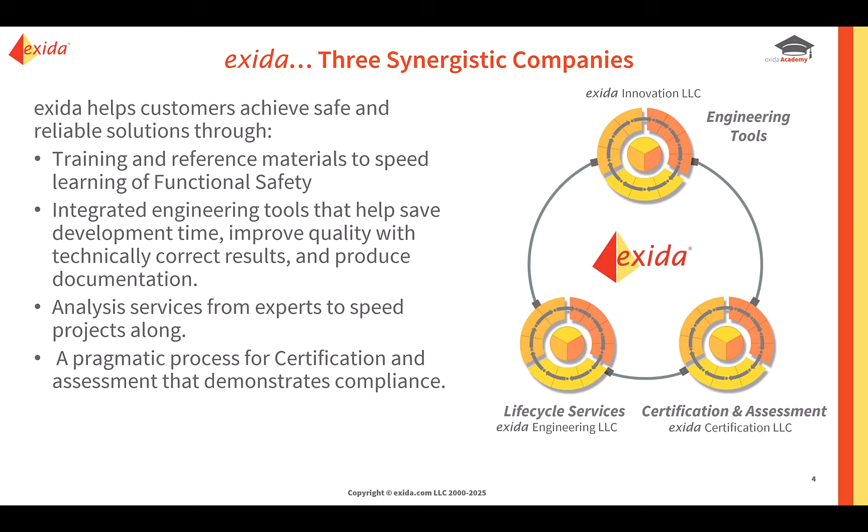exida has a suite of products and services to help all those who are new to functional safety, from training through functional safety certification. For some, the discipline of functional safety seems overwhelming.

I once asked a senior engineer, George, for an estimate of the effort it would take to meet this new functional safety standard. He said, "Give me a week." I said, "Okay." I went back a week later and asked, "Well, what's the effort?" He looked me straight in the eye and said, "If we take all the engineers in this building and work the rest of our lives, we will not meet this standard." Oh boy, George, bit of an overreaction?

Well, for those who have only a little bit of that panic about functional safety, we can explain a bit today. We can talk about what is functional safety. We can categorize many pages of requirements into two fundamental concepts of functional safety. We can present an example new product development which meets the requirements, and we can discuss functional safety certification, what it is, and how to prepare.

Functional safety is an engineering discipline defined by international standards for the design and operation of automatic protection systems. You're probably thinking, what's an automatic protection system? Well, it's a system that detects hazardous, dangerous conditions and automatically takes action to reduce or hopefully eliminate the harm.

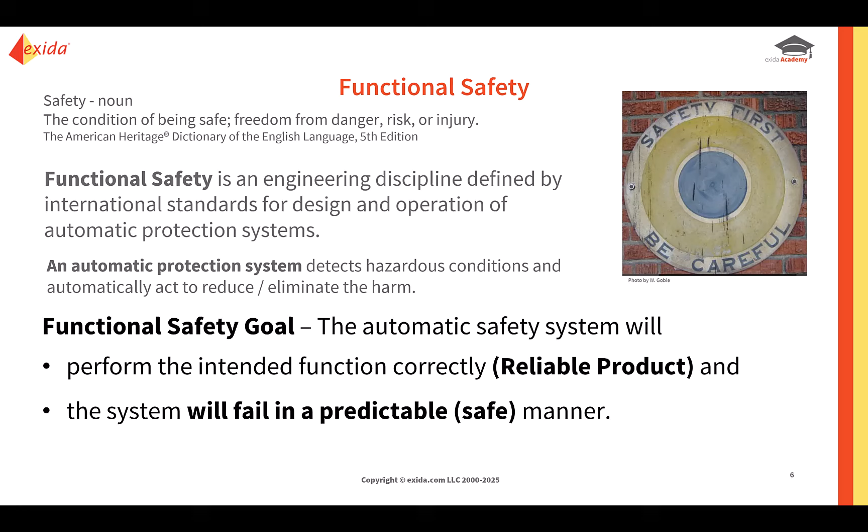But for functional safety, we must go further. We must deal with product failure modes and design so that if the product does fail, it will fail to a safe state. Functional safety is spreading to many different industries.

You can look at the various potential applications from different industries. Let's take a look at the autonomous lawnmower, for example. One of the most important safety functions is detect an obstacle: a person, maybe an animal like my pet, maybe a rock, which could damage equipment. When we detect this hazardous condition, we will de-energize the wheel motor, de-energize the brake withhold, which will apply the brake, and notify the operator via a wireless, probably cell phone connection.

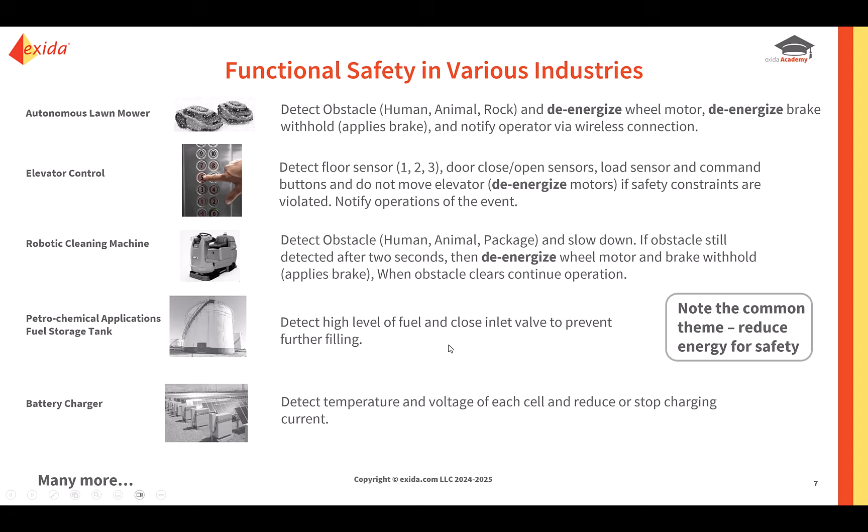If we look at all the other applications, we are seeing common requirements for detecting dangerous, hazardous conditions and taking actions. Let me drop down to petrochemical. Petrochemical applications are where functional safety started. For example, detect high level of fuel and close an inlet valve to prevent further filling, actually to prevent tank overflow. Note the common theme: reduce energy to achieve safety.

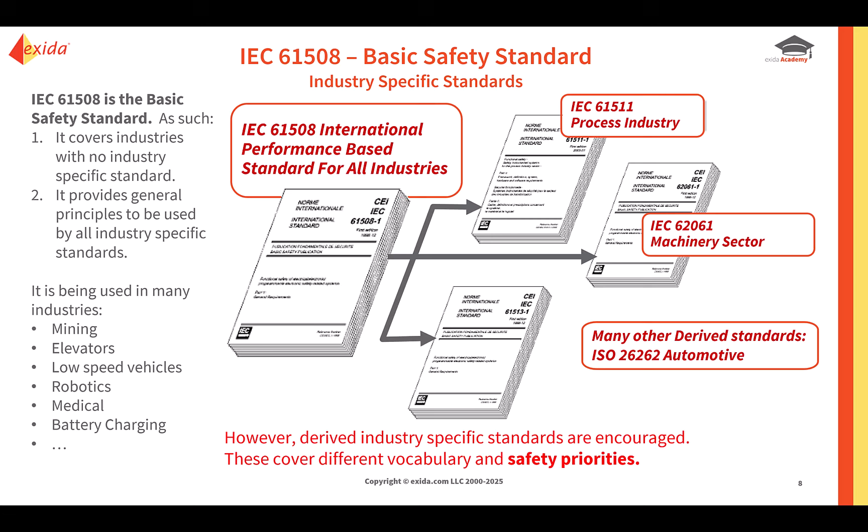IEC 61508 is the basic safety standard from IEC. There are industry-specific standards derived from 61508, and these standards provide different industry vocabulary and deal with different safety priorities of different industries. 61508 is used, however, in many industries where there is no industry-specific standard.

You can read the definition from IEC 61508. I remember reading it early on and thinking, I'm not sure I understand this. First thing I did is look up the acronym EUC, Equipment Under Control. And I was thinking, now what does that mean? It's the process we are trying to protect.

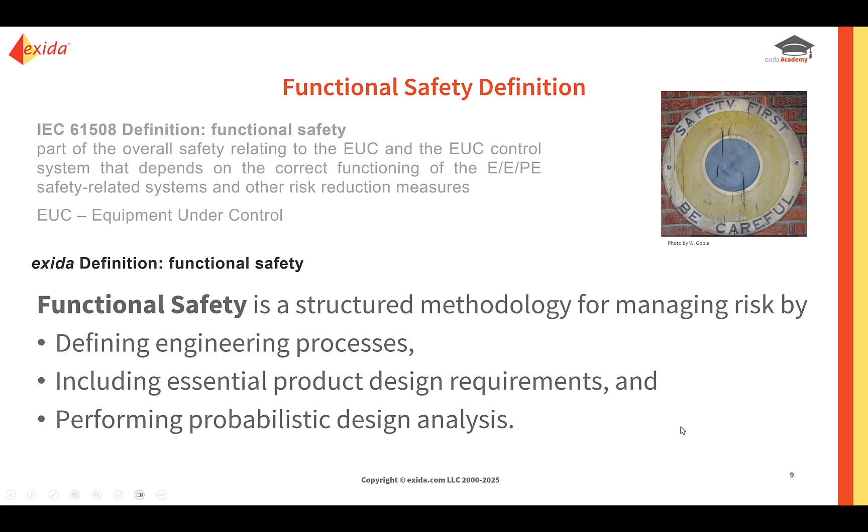That is very formal, so exida prefers a definition: functional safety is a structured methodology for managing risk by defining engineering processes, including essential product design requirements, and performing probabilistic design analysis. We can take all of the pages of requirements and sum them up into two fundamental concepts.

Number one, on the left, is the safety life cycle. That's the term they use for a detailed engineering process created to achieve high levels of design quality. The other concept, probabilistic performance-based system design, deals with random failures. That helps us achieve higher levels of hardware reliability.

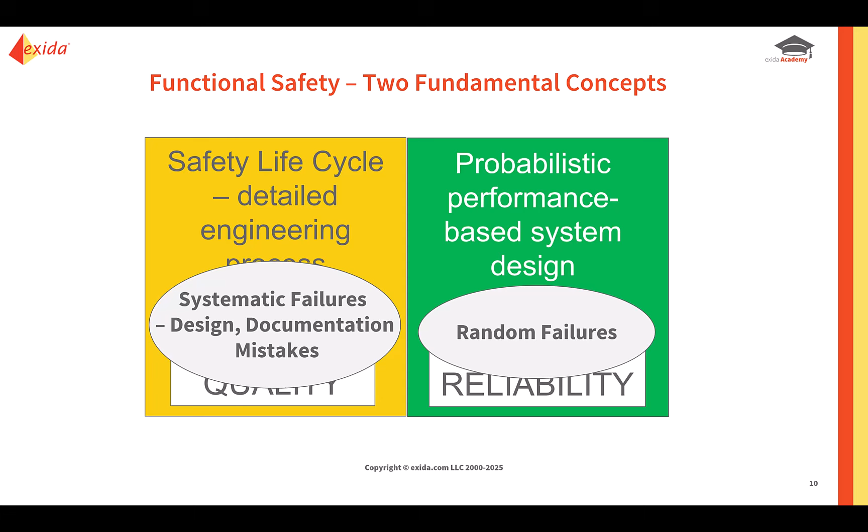These categories of failures are called systematic failures, design documentation mistakes, random failures like hardware component failures, or maintenance failures that cause hardware failures. An engineering process for new product development must be documented. Now, you probably recognize the V model on the right-hand side. It's very commonly known. The safety life cycle applies from initial requirements to the release to production.

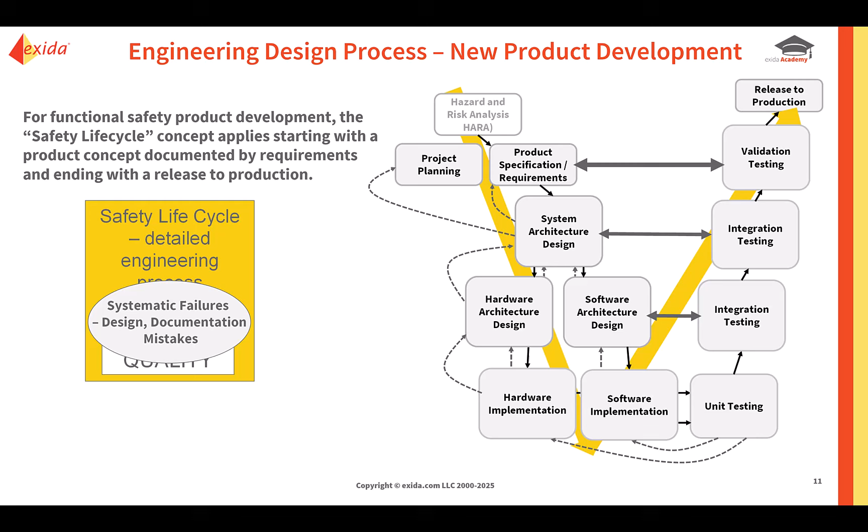There is a metric called systematic capability. The development process is rated per process rigor and design features. A defined development process is assessed and given a rating according to one of the 4 levels in the standard called Safety Integrity Levels, or SIL.

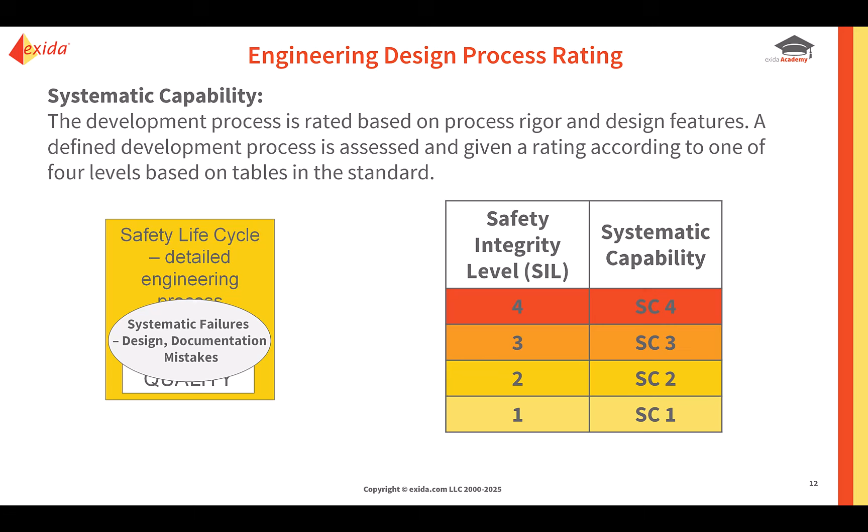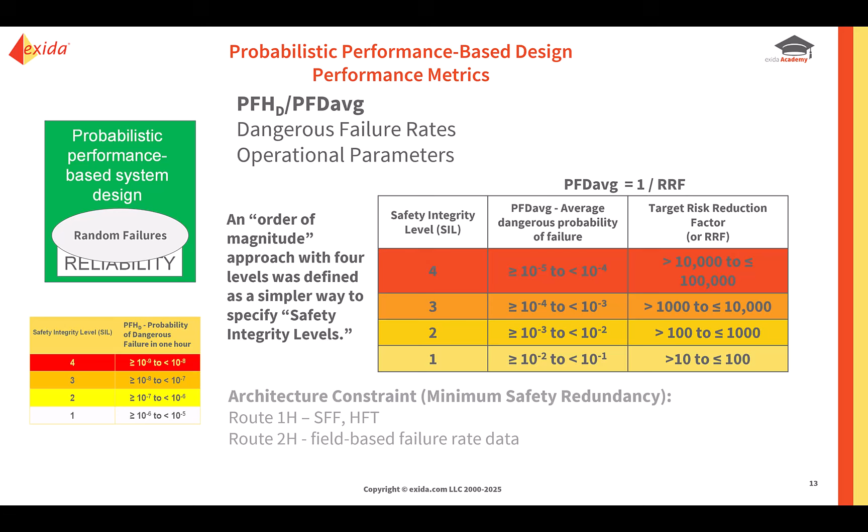Systematic capability rating just matches the safety integrity level. As the level number goes up from 1 to 4, the level of process rigor and design features increases. The probabilistic concept depends on detailed hardware analysis. There are 4 safety integrity levels, and each level has a maximum probability of average dangerous failure.

The development process for systems versus product is quite different. Looking at a system for a minute, consider the example of a low-speed vehicle such as an autonomous tractor.

Sensors are selected to recognize and sense the dangerous conditions. For example, a LiDAR might be used for obstacle detection. A controller, typically an embedded controller, is part of the system because it's programmed to detect signals from these various sensors and convert them to potentially dangerous, recognizable conditions. Finally, there are products on the output of the safety controller, which are used to actually implement the safety function, and in most cases that means removing energy from the process.

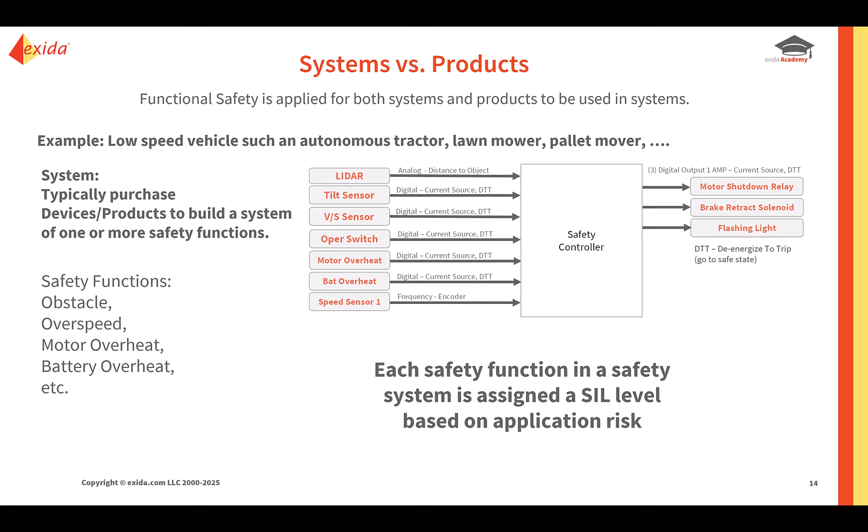Each safety function is assigned a SIL level based on application risk. As we look at different applications in different industries, we see that most risk analysis shows a SIL 2 or a SIL 3 requirement.

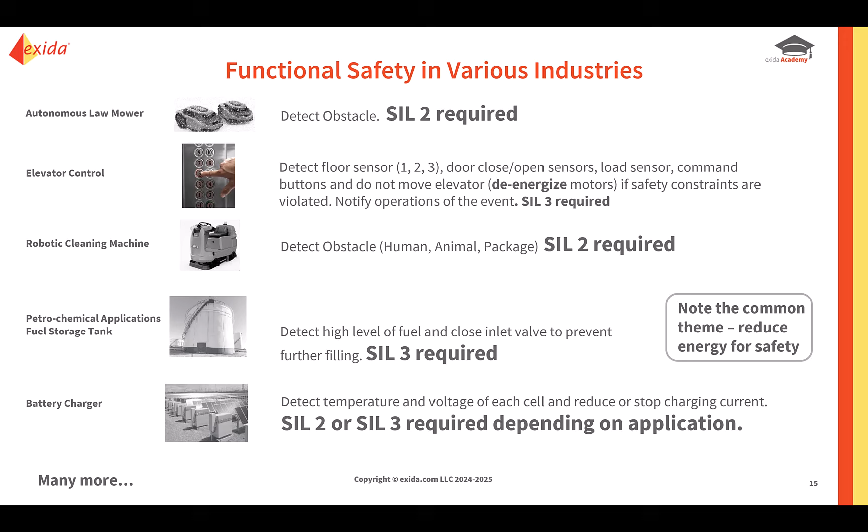Product development is quite different. If you look at the bottom part of the screen, what we're talking about here are devices, products like the sensors, like the safety controller, and like a flashing light or a motor shutdown relay.

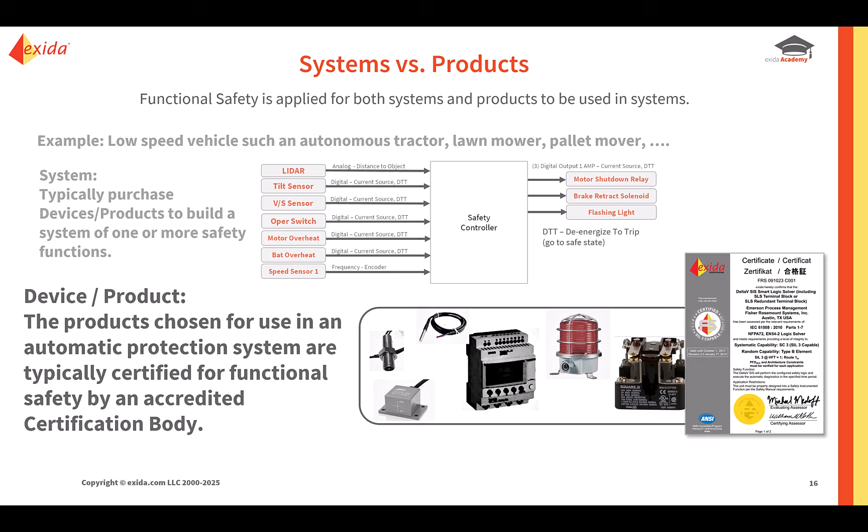Devices are products chosen for use in an automatic protection system, and they are typically certified for functional safety by an accredited certification body. Now, we talked about the need for a development process at the product level, and we showed you this V model, but that is not nearly enough detail.

A documented development process for functional safety must show the engineering tasks, input documents for each task, output documents produced by each task, and the design verification tools. Let's call them quality verification tasks that check to make sure each step was done properly with sufficient quality.

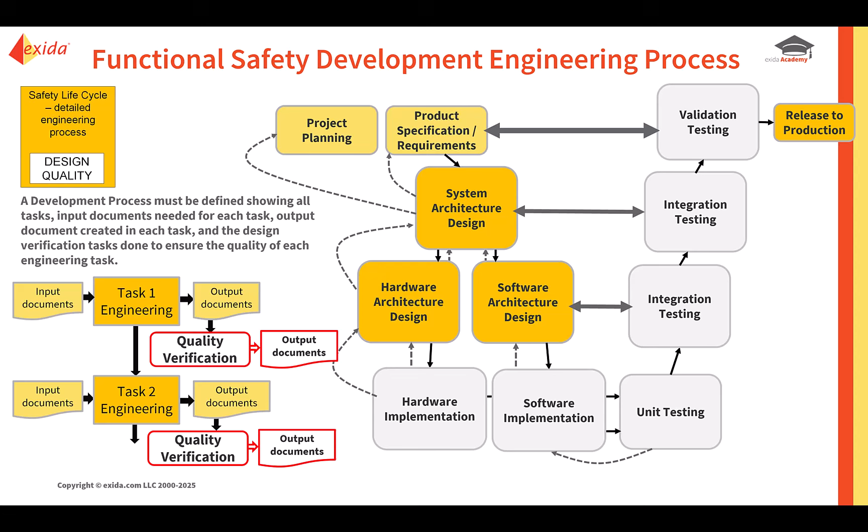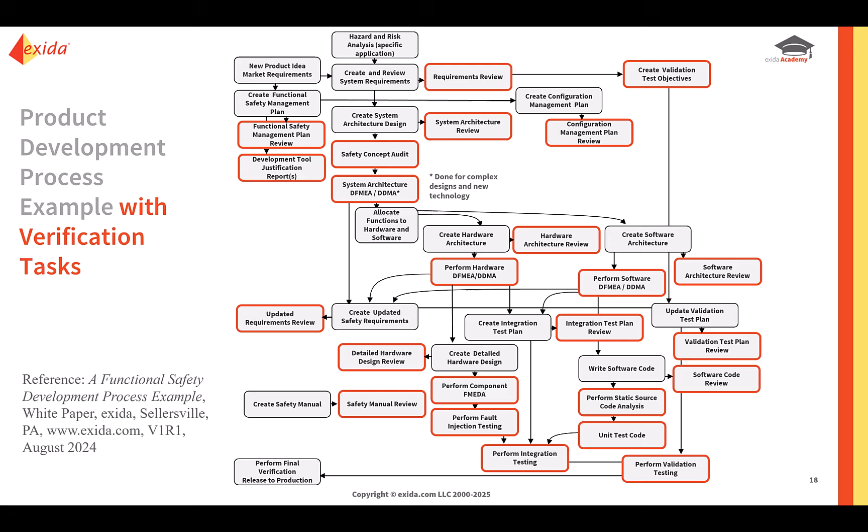A documented, audited process is required with sufficient detail for a new engineer to understand. The concept of corporate tribal knowledge is not sufficient. Now, here's a drawing that shows a development process with more detail, including the design verification tasks. We're going to talk about each phase of development from this picture in the next few slides.

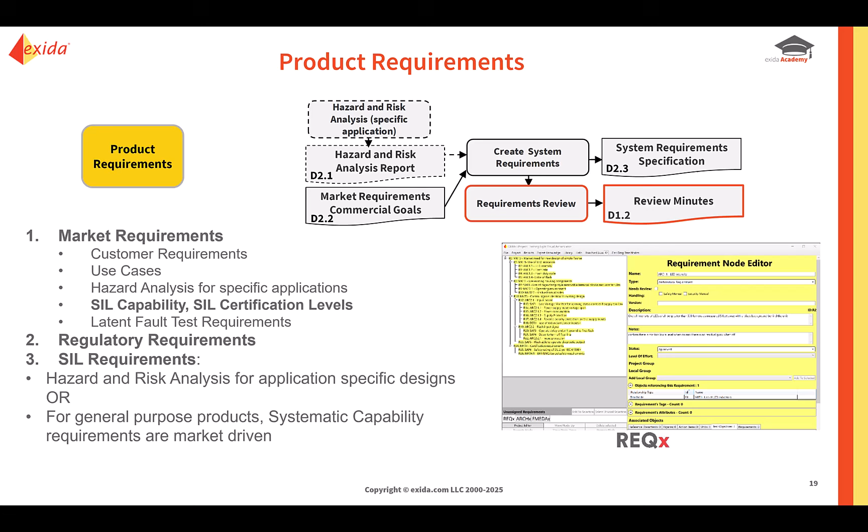Product requirements include market requirements, regulatory requirements, and functional safety requirements from a hazard and risk analysis if the product is being designed for a specific application. However, that's not typically the case, and for general purpose products created to be sold into many different applications, systematic capability requirements are market-driven. Generally, requirements are categorized.

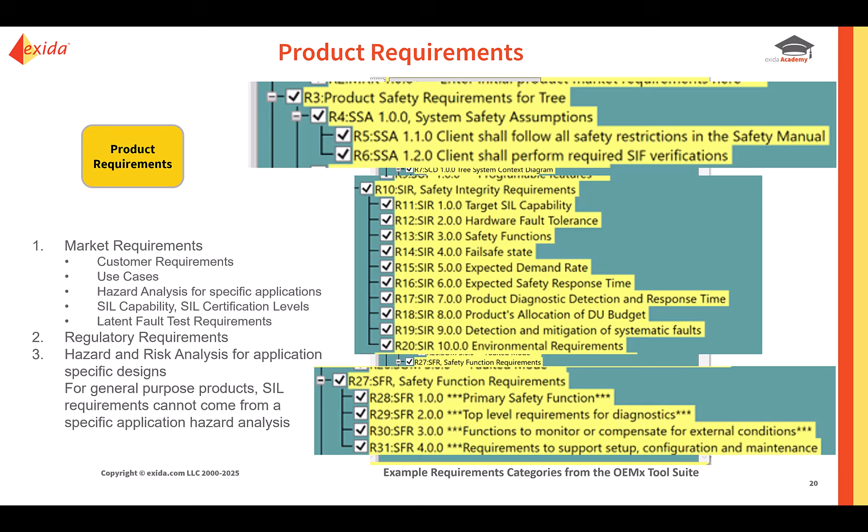They might include, for example, system safety assumptions. They might include safety integrity requirements, safety function requirements, to as much detail as necessary for proper implementation.

As soon as draft requirements are available, we must start the validation test plan. At this point, it's perfectly acceptable to simply write down high-level test objectives. And what we mean by the word test is any actual test, an analysis, or an inspection.

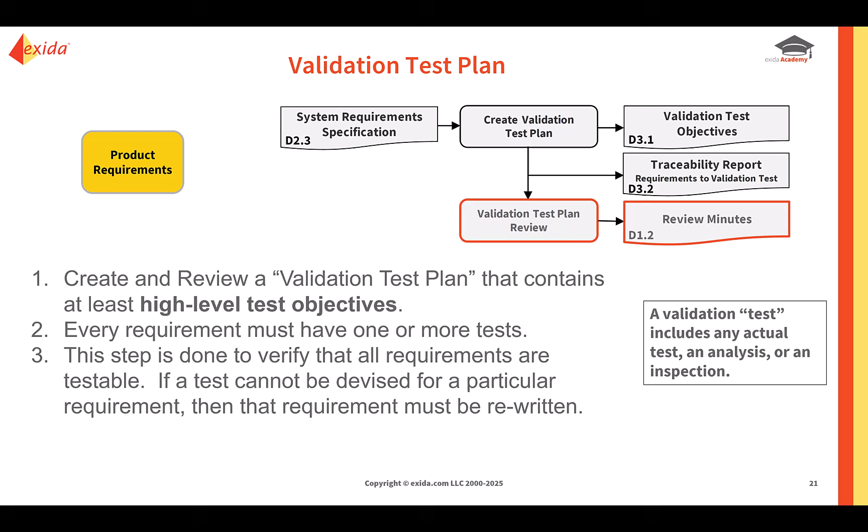Every requirement must have one or more tests. Each test could satisfy one or more requirements. We start the validation test plan because we need to make sure that all requirements are testable. If we can't think of at least one validation test plan objective, then that requirement is probably quite unclear and must be rewritten.

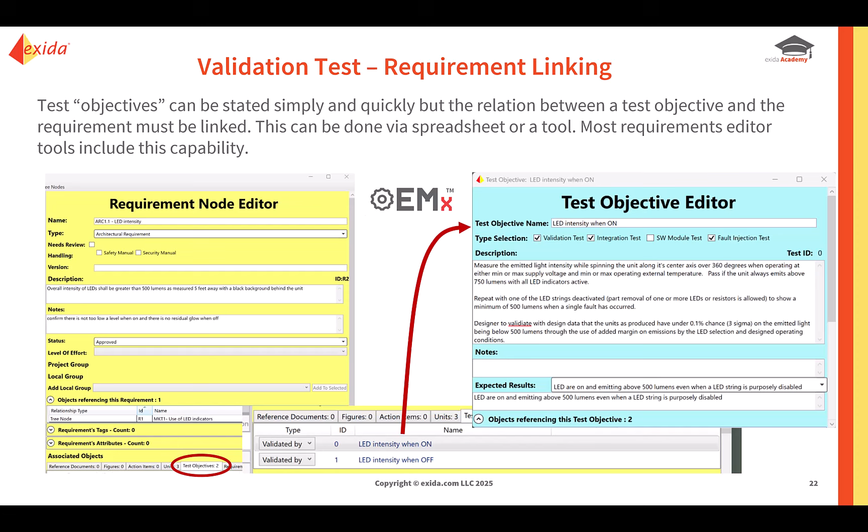One thing that is required by functional safety, and although it seems bureaucratic at times, it's really valuable: there must be links between requirements and test objectives. What we do with this is verify that there are at least one or more tests for each requirement. Now, fortunately, most requirements editor tools include this capability.

Once we have requirements, we can start architecture design. We create and review an overall design by hierarchically partitioning large functions into subfunctions, and that's a classical structured engineering process. We go down to the level where each functional unit has one function or a related set of functions. When that is done, functions are allocated to hardware and to software.

When we have a good hardware and a good software architecture, we perform design verification with design deviation and mitigation analysis to verify design integrity. We update the requirements, perhaps if we find things we have missed, and then we must update the validation test plan.

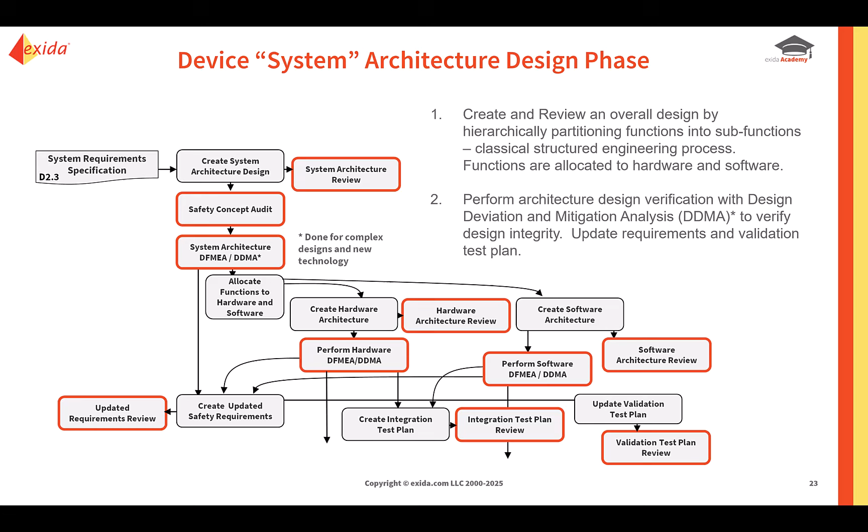What is this thing called design deviation and mitigation analysis? Well, it is an enhanced DFMEA technique, design failure modes and effect analysis. DDMA accomplishes the essential purposes of DFMEA, but it also gathers the important information needed to document functional safety and to provide input to later analysis tasks. The primary value in a DFMEA is to find problems early in a design, and if needed, recommend mitigations.

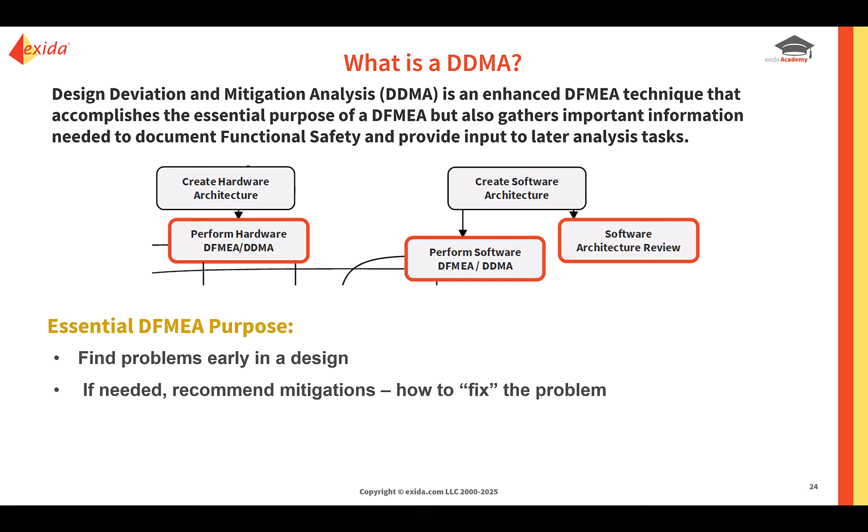In other words, this is not good. How do we fix this problem? Don't we do this in a DFMEA? Yes, the essential purpose is accomplished.

But what's missing is the need to gather important information needed for functional safety and provide input to later analysis, because that's not normally part of a DFMEA.

The information we need includes a description of all automatic diagnostic mitigations intended for the design. We need to know the action taken when a diagnostic detects a failure mode. Yes, you have to address that in the architecture design. We need to estimate the expected effectiveness of any diagnostic for a particular deviation, a particular unit failure mode.

We also should, at this point, define any latent fault tests, or what's known as a proof test. A proof test is a valuable concept that can drastically improve safety. It needs to be planned as part of the architecture design.

And lastly, during the architecture design, we understand how units are connected. This is the perfect time to define any needed integration tests. Now, it's not commonly done in DFMEA at all, and a lot of people say, why do you do that for? I'm not going to run my integration tests until later in the process.

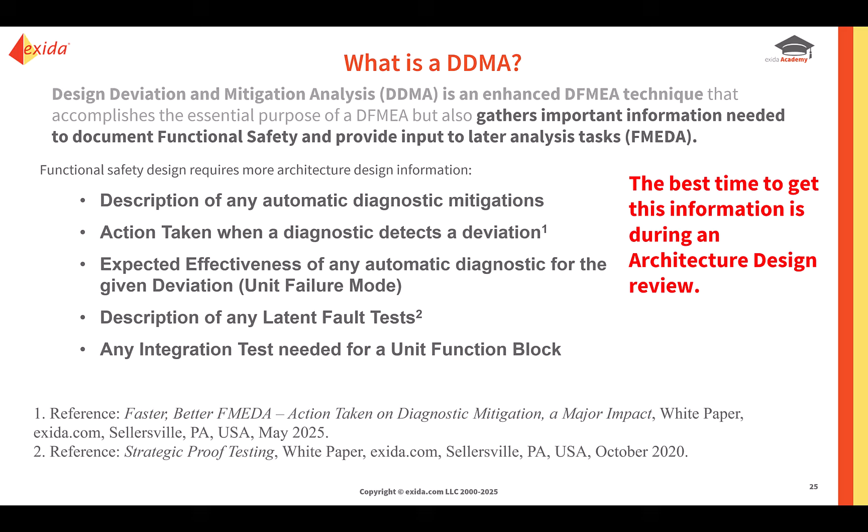There are DDMA tools available. Some of them have suggested deviations and mitigations. Some of them provide a common resulting impact, an end-level failure mode. Some of them have suggested integration test objectives and latent fault test objectives. Some of them have estimates of the diagnostic coverage for designated automatic diagnostics.

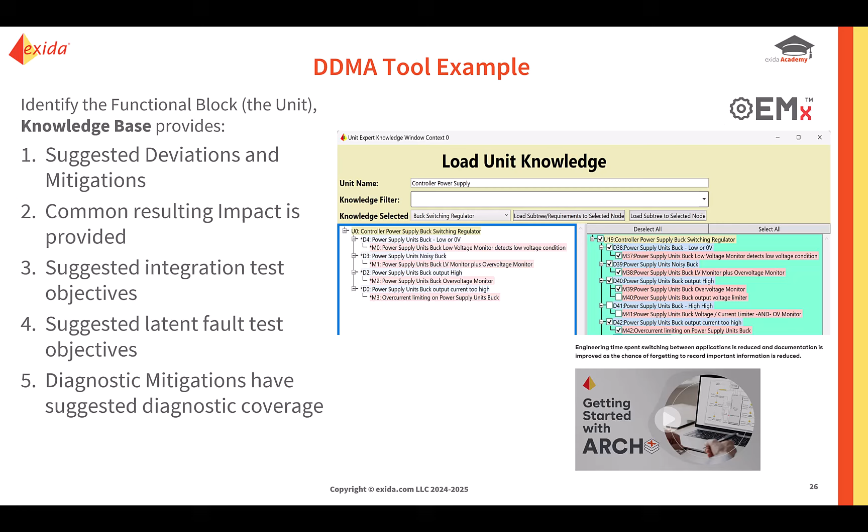Let's take an example of this simple visual flasher. Whenever a dangerous condition occurs, an input signal tells it to start flashing a bright red signal. Normally that means, if you're near me, leave now. The power supply block is of interest.

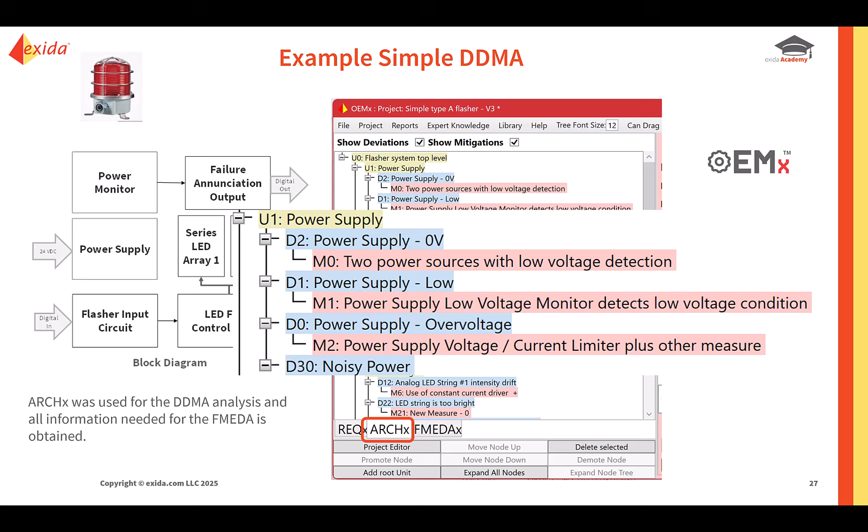Let's go to that first because it's something most people understand. If I hit a DDMA tool and select a unit power supply, the tool will provide failure modes, or what we call deviations, and they are given in this light blue background color. I can see that the designers have chosen 3 mitigations for these particular failure modes, and they are all displayed from a suggested list.

When the architecture is complete, and we have a list of all the blocks, and we have a description of the function of each block, we can proceed with hardware design. And that's, of course, where you choose components, you do an electronic circuit design, and a schematic showing the relationship between the components, and basically describe how they meet the intended functionality. When that's all done, when the draft detail hardware design is done, we can perform a task called

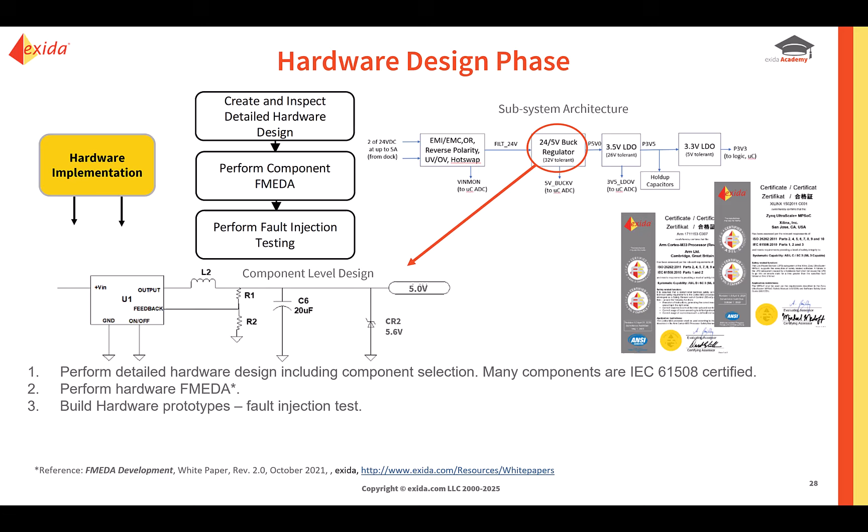FMEDA, Failure Mode Effect and Diagnostic Analysis. Finally, of course, we build the hardware prototypes, and often we will do what's called a fault injection test as an integration test at some point later in the process.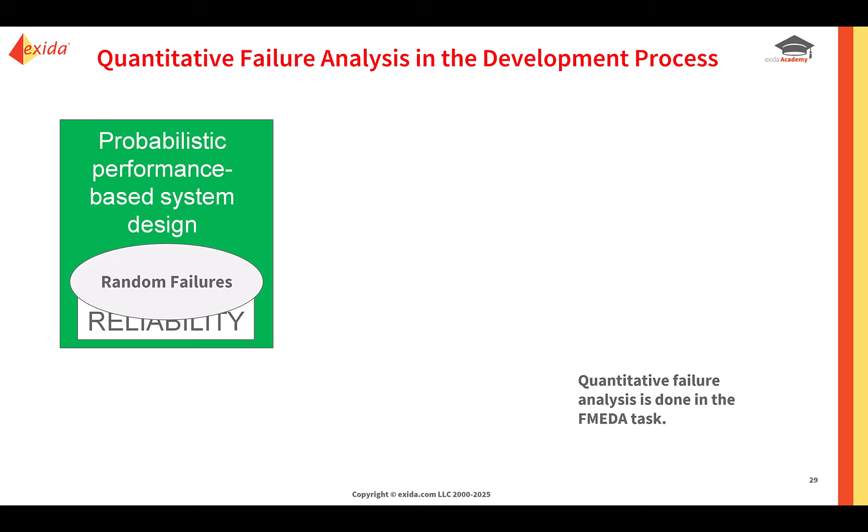Now, I talked about early on the second fundamental concept, probabilistic performance-based system design. That is done in the FMEDA. What's an FMEDA? It's a bottom-up inductive quantitative analysis where failure rates and failure modes of each component are used to predict the failure rates and failure modes of a subsystem.

Subsystem blocks can then be used to predict the failure rates and failure mode of the next higher level architecture blocks, all the way up to the complete device. An FMEDA does need a quantitative failure rate database for each component as a function of product environmental stress, and actually of design strength.

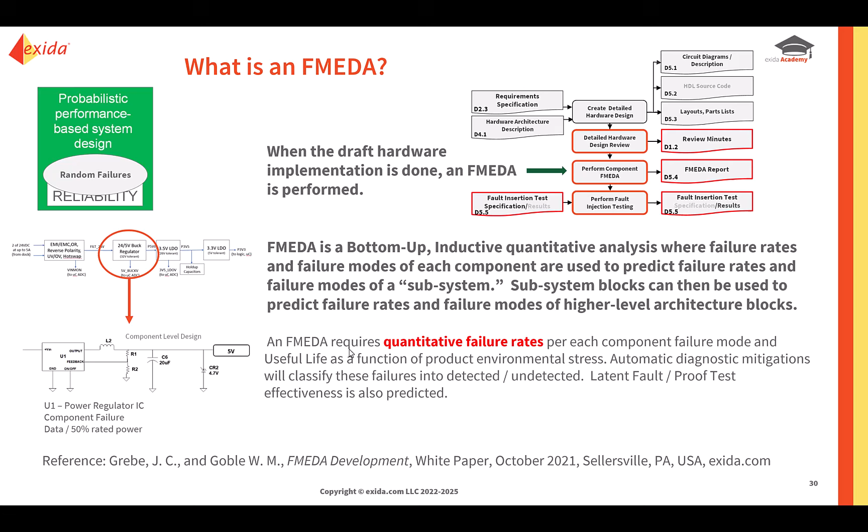Automatic diagnostics mitigations will classify these failures into detected or undetected, and latent fault proof test effectiveness can also be predicted in an FMEDA. Well, why do we do this thing called an FMEDA? It sounds complicated. Well, it can be if you don't, especially if you're using a spreadsheet or you're doing it the old-fashioned way. But this is not just a checkbox for functional safety certification.

There are many reasons the output of an FMEDA is needed. It's needed for design improvement. An FMEDA often identifies weaknesses in a design right now before you even build the first prototype. The FMEDA will predict field reliability performance, which is useful in certain business metrics.

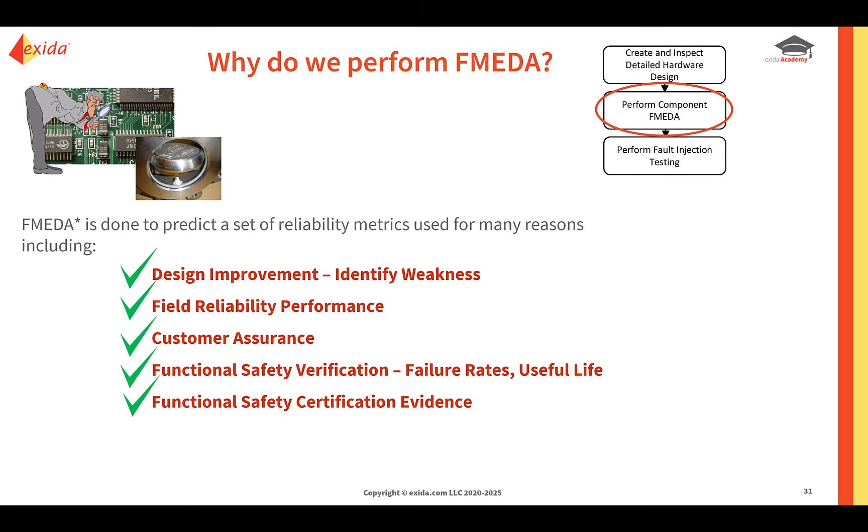An FMEDA will provide customer assurance. The failure rates and useful life of every device are considered as part of the systems level probability of dangerous failure calculation. And lastly, the FMEDA is an essential part of functional safety certification evidence.

There are FMEDA tools on the market. A mechanical and electrical component database is absolutely required. The component node editor screen from FMEDAX is shown. In this case, we enter all the components into the unit tree diagram.

For each component, we will map the component failure mode to the unit failure mode, and then we can answer questions about design strength for each component. And when all components are entered, you click the tab to get the results.

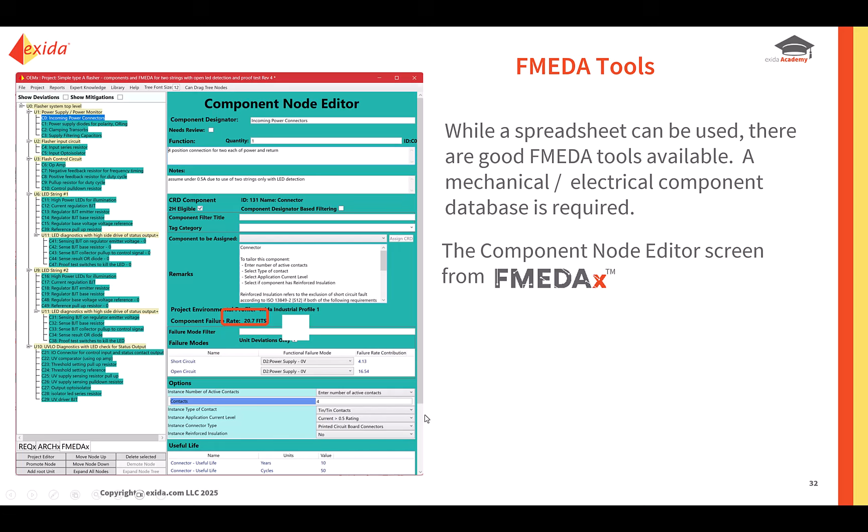Component entry can be a pain. Bill of material import does help that quite a bit, but you still have to make sure all the components get entered properly.

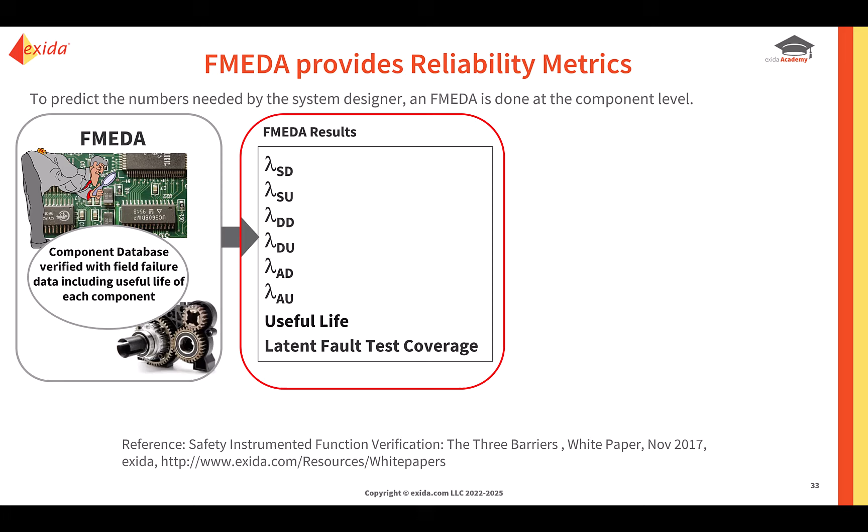The FMEDA output is a set of failure rates in different failure modes, categorized by detected versus undetected. Another output is the useful life of the device, because that defines the period of time for which the failure rates are valid. A third important output is your latent fault or proof test coverage or effectiveness. FMEDA can produce all of that information.

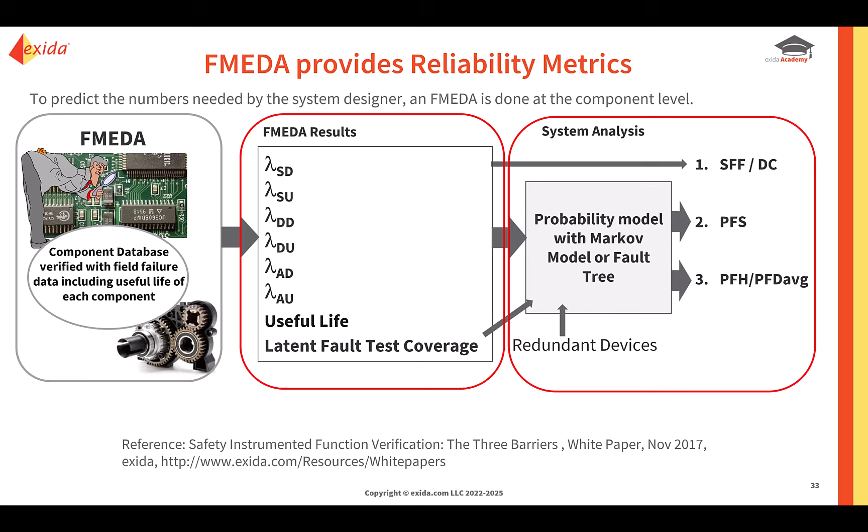System analysis provides the metrics we need to see if this particular design meets SIL requirements.

An FMEDA tool should provide all of the various failure rates for all of the various failure modes. It should provide a diagnostic test interval, how fast the diagnostics work, which is important when considering demand rates. It should also provide useful life, the period of time when the failure rates are valid.

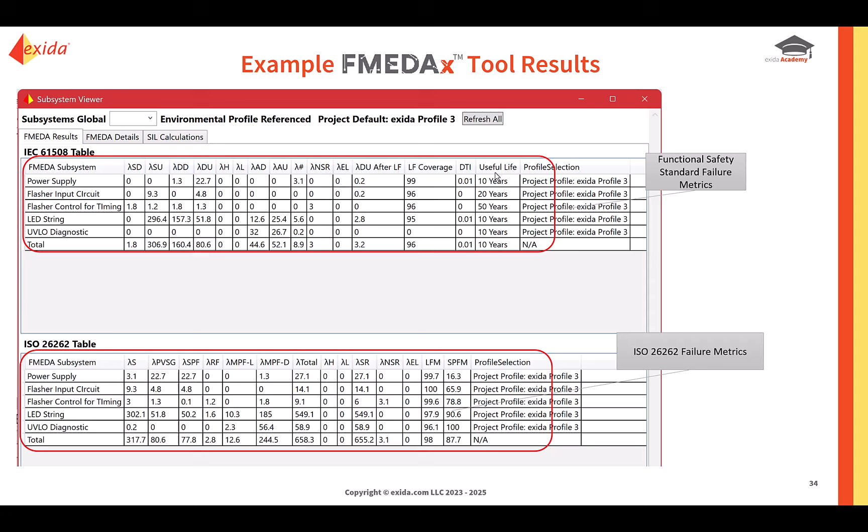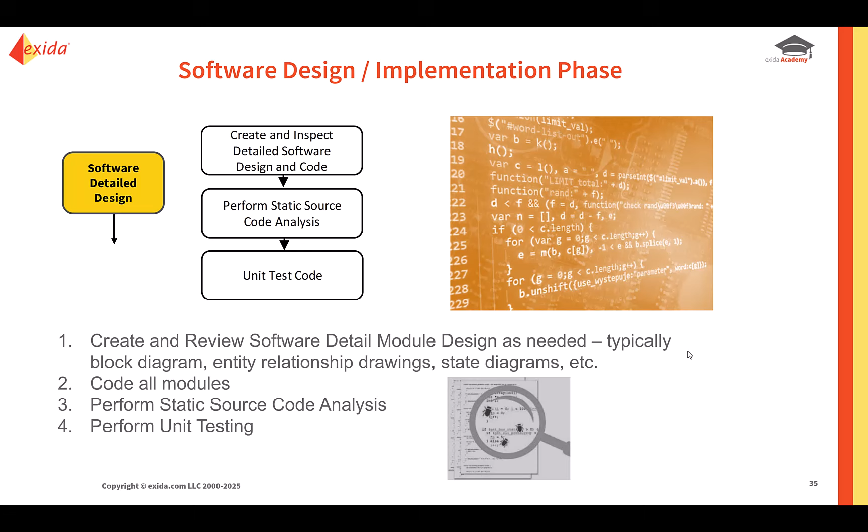Software design and implementation can proceed once the software architecture is created. Normally that involves adding any additional design detail as needed. We need to code all the modules, and we need to perform static source code analysis and unit testing.

When the hardware and the software is done, integration testing begins. For hardware-only integration, we look at the different blocks and make sure the electrical signals or mechanical interconnections provide what's necessary to make sure all the pieces of the puzzle fit together. Same with software integration, does the output of one software unit provide what's needed? The objective is pretty simple: we've got to make sure all the pieces of our design fit together properly.

Integration test plans should be written to confirm behavior in normal operation and confirm that the design behaves or fails as expected during abnormal operation. Most integration test objectives are defined during the architecture design review.

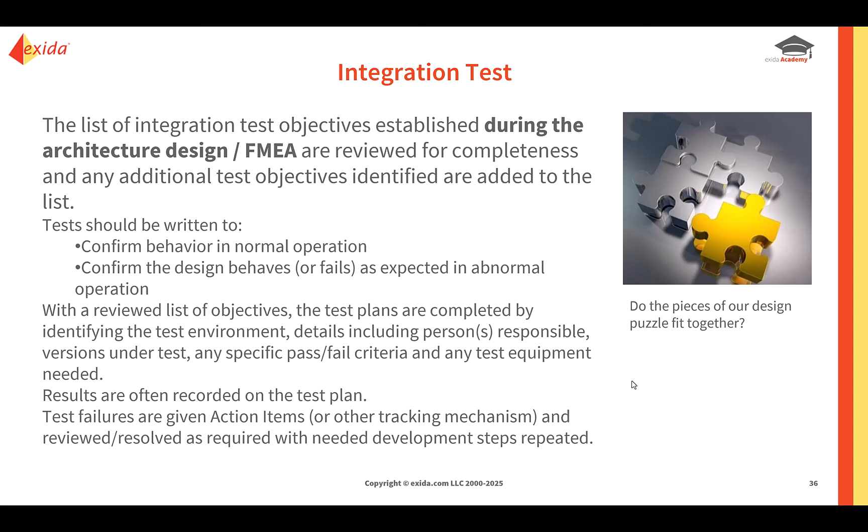Given that list of test objectives, the test plans are then completed and detailed with the test environment, persons responsible, versions under test, specific pass-fail criteria, any test equipment needed, calibration details, and so forth. Results are often recorded right on the test plan, no reason for extra documentation. If something fails, we need to write up an action item so that the failure mechanism can be reviewed and resolved as required.

When a product is fully integrated and we effectively have a prototype, we can start validation testing. Validation testing is considered a black box test, and of course, the validation test plan is based on the validation test objectives that we defined during the requirements phase of the project.

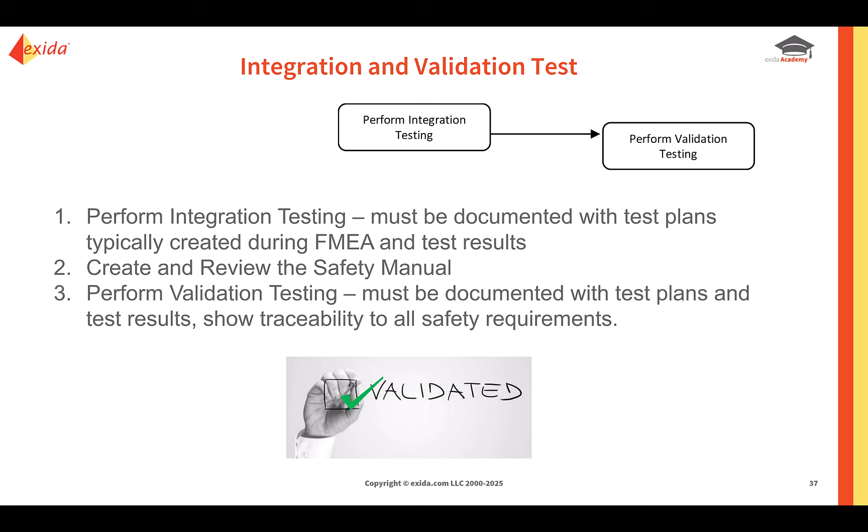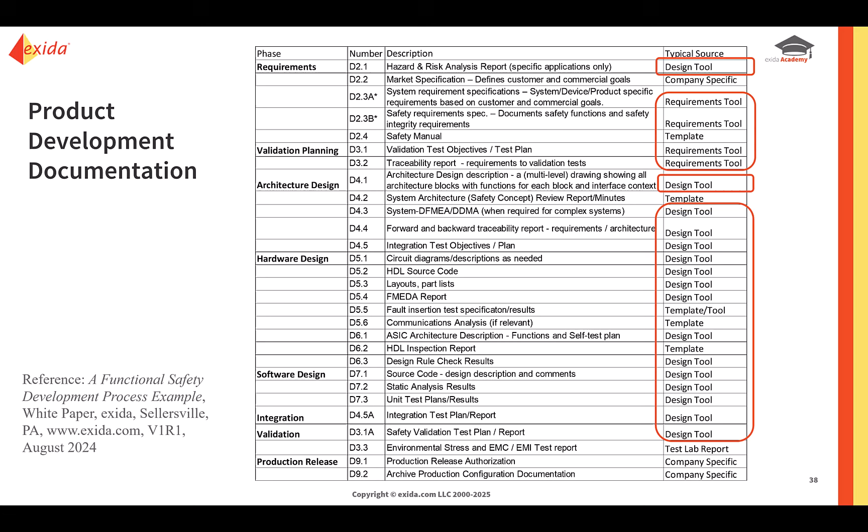Why oh why, why do we need all this documentation? Well, the objective of all this is to make sure we have enough so that the original design intent is clearly specified, so that we can make changes in the future without creating more problems than we fix. I know that sounds sarcastic, but boy, that happens a lot. This list looks bad because it's a long one, but remember that a lot of the documents can be created by the design tool.

What is functional safety certification? Well, it's a process by which a system, a product, a process, or a component is evaluated per IEC 61508 and one of the industry-specific functional safety standards. This certification process is governed by another standard, ISO/IEC 17065, which dictates the requirements of how to operate a certification program.

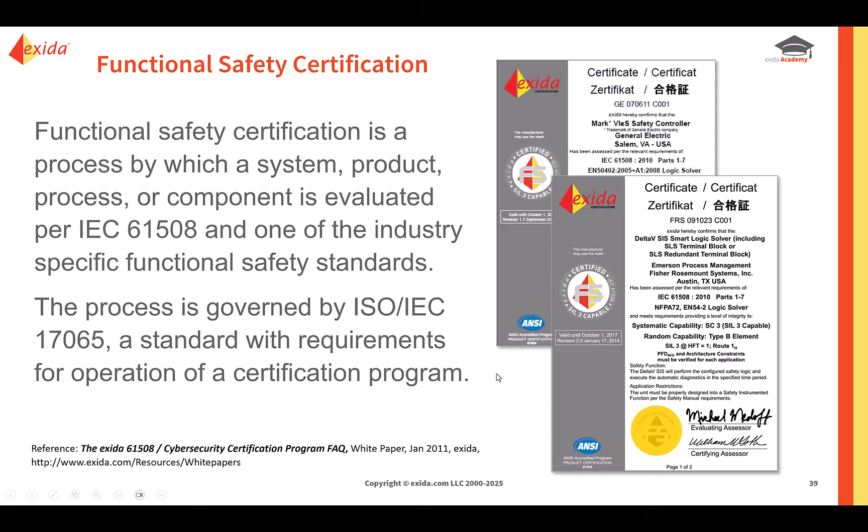Who gets to do certification? Well, technically anybody could, but there are accreditation bodies that will audit and accredit a certification body. For example, Exida.com LLC is accredited by ANAB, the ANSI National Accreditation Board, and Exida Ireland Limited is accredited per INAB, the Irish National Accreditation Board, because the EU has set up its own system of accreditation.

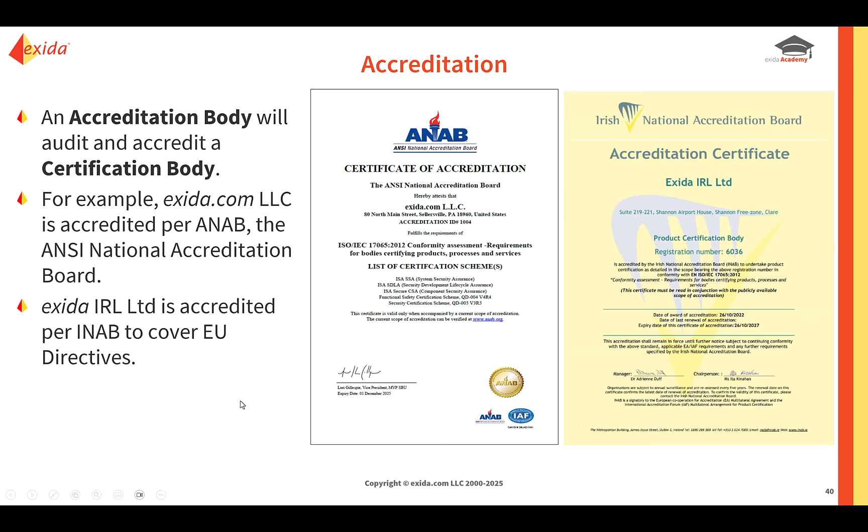How does a product get a functional safety certification? Well, at this point in time, over the last decade plus, maybe 100 companies have achieved a Systematic Capability 3 rating by Exida certification per IEC 61508 and other functional safety standards.

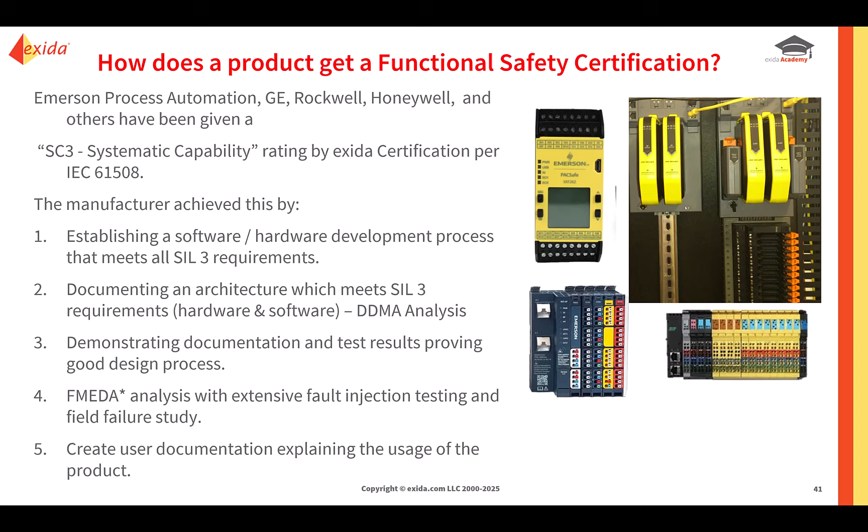They achieved this by establishing hardware and software development processes that meet the specific requirements of 61508 for SIL 3. They documented an architecture which meets SIL 3 requirements, complete with a DDMA analysis. They demonstrated good documentation and test results proving that they are actually following their process. An FMEDA analysis has been done with extensive fault injection testing and, if practical, verification via a field failure study. And lastly, they've created user documentation explaining how to use this product safely, typically called the safety manual.

In summary, functional safety is a set of rules and methods for specification, design, and operation of safety functions, which are part of automatic protection systems. The goal of functional safety is to make sure everything works, has the highest levels of reliability practical, or that the system will fail in a safe, predictable manner. And although the engineering process looks tough, new methods developed in the last few years, including DDMA, and new tools are helping new product development achieve better results and balancing the trade-offs.